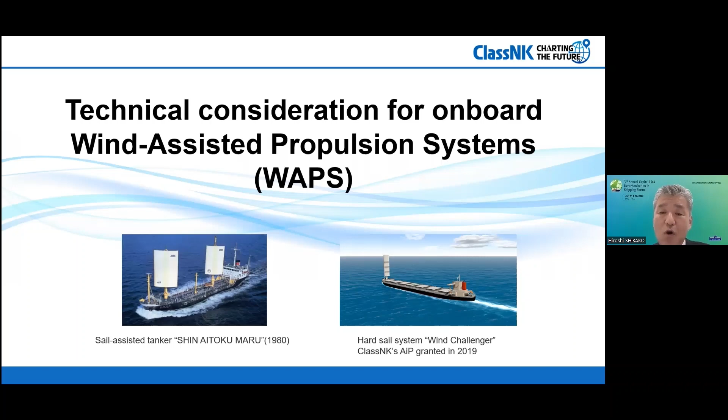Meanwhile, the technical and safety challenges for the installation and operation have been mostly identified, and the necessary countermeasures have been established. Today, on this occasion, I'd like to introduce what should be considered to utilize the wind-assisted propulsion system, so-called WAPS, on board from a technical point of view.

I briefly outline the typical types of wind-assisted propulsion system. Firstly, rigid sail. The sail of the wing-like cross-sectional shape generates lift by capturing the wind. The control of the sail angle, spreading, and setting can be operated according to the wind speed and direction. With no deformation on the sail surface by wind, it can always maintain the optimal wing shape.

A coal carrier equipped with the world's first FRP-based hard sail was delivered to MOL in October 2022. MOL presented at a seminar last year that they plan to confirm the effectiveness of the sail during the demonstration test until the end of March 2024. On its maiden voyage from Japan to Australia, the performance was high when all 4 stages were deployed, and a reduction effect of about 8% was confirmed in the low speed range.

Secondly, the rotor sail. This is a cylindrical device that rotates at high speed, not by the cross-sectional shape approach. It obtains lift by the Magnus effect, a phenomenon in which lift is generated in the direction perpendicular to the flow when a rotating cylinder or sphere is in a uniform flow. The rotation speed is controlled according to the wind speed and direction. High lift coefficient can be achieved by the rotating mechanism. It has a simple structure, and collapsible types are also available.

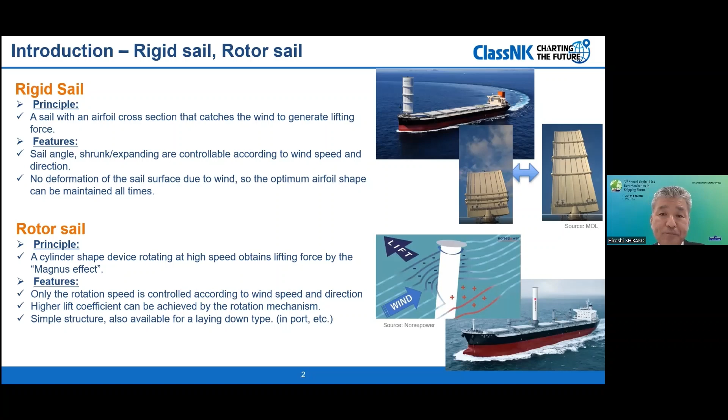Thirdly, towing kite. A kite is deployed from the bow of the ship forward, and it generates propulsion power by catching the wind and pulling the ship. The kite flight is automatically controlled, and its launching and storing are also automated. It can utilize stronger wind at higher altitude. In March, K-Line specified the coal carrier to retrofit the system. They expect the reduction of CO2 emission by at least 20%.

Finally, turbo sail or suction wing. It controls the boundary layer around the device and generates lift, not with the rotating mechanism, but by using movable flaps and a suction mechanism. The suction mechanism and the flaps are controlled according to the wind speed and direction. A higher lift coefficient can be achieved by the suction mechanism. As well as the rotor sail, the structure is simple, and they are collapsible type.

Marubeni Corporation, a Japanese trading house, announced a joint project with partners for its installation on a Panamax bulk carrier, and expected a reduction of up to 15 to 20%.

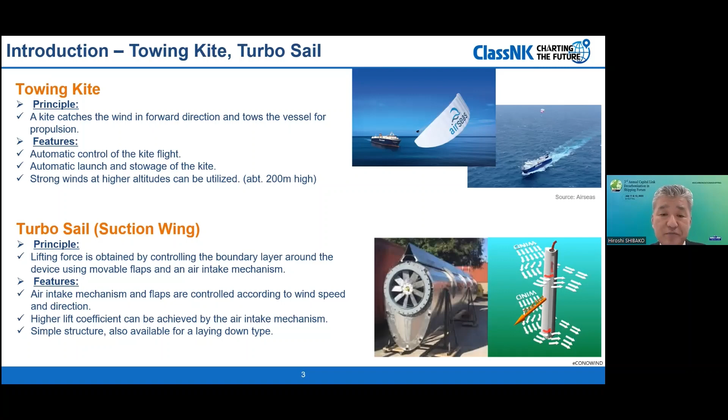For implementing these systems, class societies provide safety standards and certification based on them. Standards are to be applied to the safety of the system itself and the safety of the base ship where the system is installed. Moreover, from an environmental perspective, as the international rule for reflecting WAPS into EEDI and EEXI had been stipulated, class societies also work on its verification. We anticipate the need for third-party certification of its effect from the commercial or ESG perspective. We believe that our expertise can be utilized in meeting these needs.

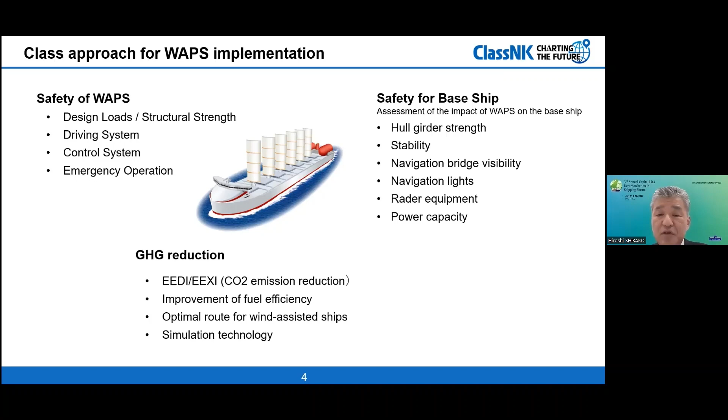Let me explain the specific verification steps. For the system's design, we review drawings and conduct on-site surveys. Once compliance of the wind-assisted propulsion system with the prescribed criteria is confirmed, we issue a product certificate. When installing the system on a ship, we review the design and conduct surveys for installation as well. Upon request, we grant class notation. In case of ClassNK, notation is optional, but periodical surveys are required if applied. As WAPS is likely to include new concepts, we may also issue approval in principle as needed.

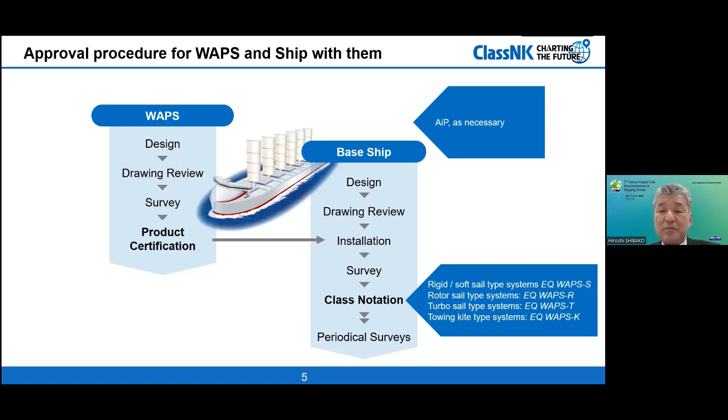We have published the standard for the system and its installation and operation as guidelines for wind-assisted propulsion systems for ships, and issued the first version in 2019. Thanks to opportunities to be involved in actual projects in recent years, we have incorporated feedback from our experienced drawing reviews and surveys, as well as recent trends, and updated to edition 2 this April. We are confident that the latest version has been significantly improved in terms of clarity, comprehensiveness, and level of detail.

The principal safety philosophy of the guidelines is based on functional requirements and risk assessment. Functional requirements include safety and reliability of the systems, safety and reliability for operation, resistance to failure, protection of personnel and environment, interference with the ship function, and assessment of compatibility.

Following the general section, the guideline provides requirements for WAPS base ships, on which WAPS is installed, and surveys. In view of identifying and mitigating potential risks caused by WAPS installation, which are new and diversified, conducting a risk assessment has been included as one of the requirements.

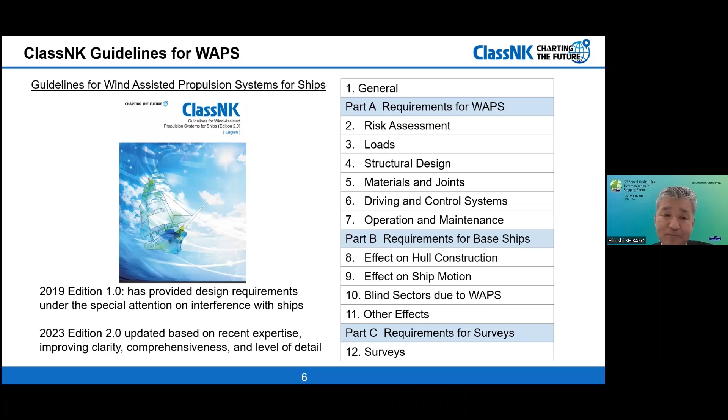As for specific requirements for the system, we have set requirements in Part A of the guidelines. For example, we have clarified and detailed loads and load cases for the structural design of the systems. 4 kinds of load are anticipated, namely aerodynamic loads, loads due to ship motion, green sea loads, and other loads. There should be 3 load cases, namely in service, standby, and abnormal condition. For each condition of 3 load cases against each kind of load, we have set the criteria, which should correspond to any potential situation.

For structural design, we provide yield strength, buckling strength, and fatigue strength evaluations for structural components of WAPS. For driving and control systems, the requirements for electrical systems, hydraulic systems, and control systems for the operational process like rotation, expansion, or contraction, inclination, movement, and storing are provided. For operation and maintenance, we have clarified the items that should be included in the operation manual. For WAPS product certification, after drawing review and surveys during the manufacturing, load tests and operating tests shall be conducted.

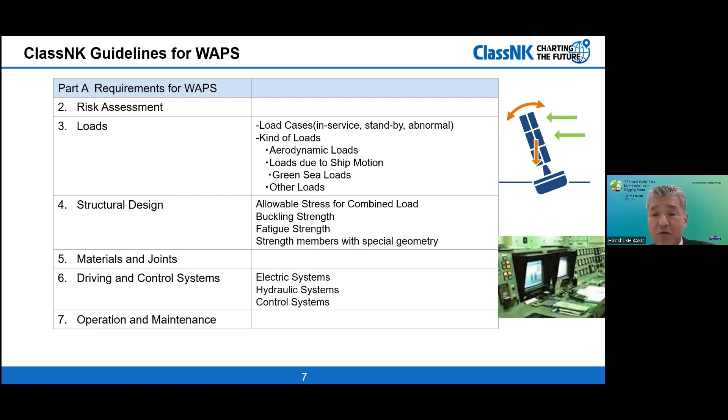Regarding the requirements for base ships, attention should be paid to these factors described in Part B of the guidelines. The ship's design should be developed in consideration of the installation of WAPS, with deck plating and under-deck structure providing adequate support for WAPS. For that, the guideline provides yield, buckling, and fatigue strength evaluation considering the load caused by the WAPS. Hull girder strength is also a factor, and changes in light weight and position of the center of gravity also affect ship motion and stability. Especially the intact stability shall be verified with the increase in wind heeling moment due to aerodynamic loads acting on WAPS.

For maneuverability, the effects of hull heel and leeway should be taken care of. For ship speed, attention is necessary not to reach a service speed greater than the speed corresponding to its engine MCR through a combination of the main propulsion system and WAPS. Then the guidelines stipulate the methodology for the impact on navigation bridge visibility, navigation lights, and radar equipment due to the installation of the system. Other matters include the equipment number, electrical installation like power capacity, protection against short circuit, and hazardous area, fire safety, and gross tonnage, and so on. In Part C of the guideline, the requirements for surveys related to WAPS are provided. After the installation, WAPS is subject to testing and confirmation at periodical class maintenance surveys.

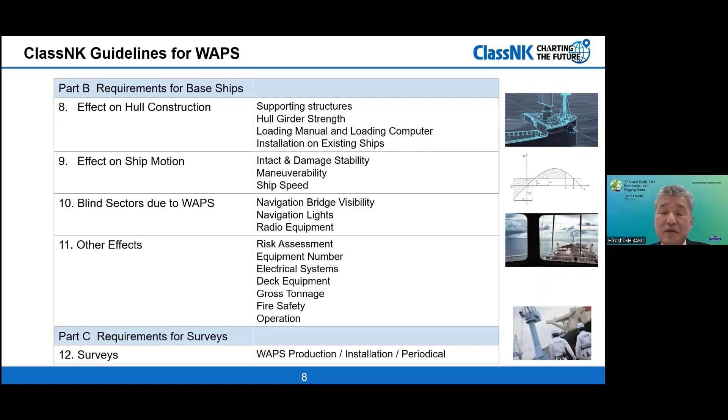I would like to refer to typical items for safety consideration. In terms of the arrangement, firstly, it is essential to comply with provisions of the class rule for navigation bridge visibility in consideration of blind sectors caused by the WAPS. For navigation lights, it should satisfy the provisions of COLREG on top of consideration of the shading caused by WAPS. Depending on the case, confirmation with the flag administration is necessary for these items. Regarding interference with cargo handling equipment or helicopter deck, confirmation for the operation at each port of call is recommended. In addition, the installation is likely to bring changes in light weight, longitudinal and vertical center of gravity. In such cases, an inclining test and update of related documents are required.

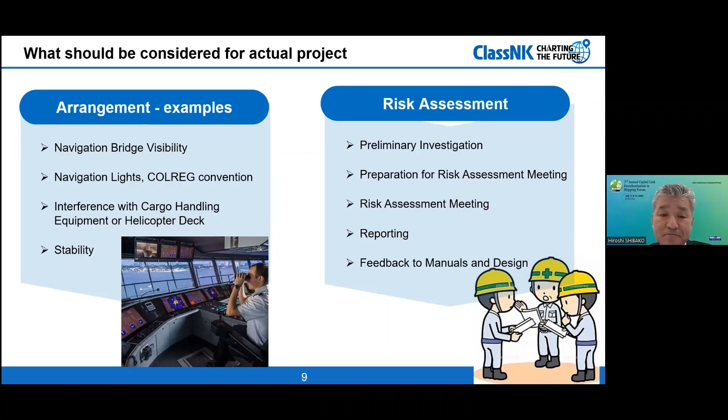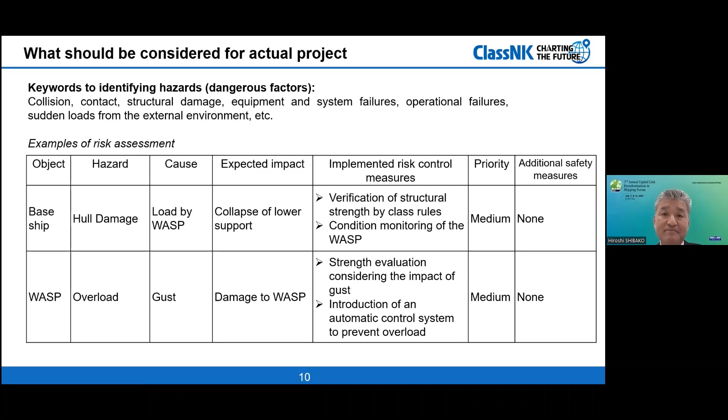We hope these tips will help facilitate the introduction of such systems. As mentioned, the uptake of wind-assisted propulsion systems is rapidly increasing. We recognize this as a reflection of industry expectations amidst the need for various approaches toward decarbonizing ship operations. ClassNK aims to support smooth implementation by establishing appropriate standards and providing reliable drawing review and survey service in line with them. We also look forward to deepening the dialogue with stakeholders, including the ladies and gentlemen attending today, for future adoption and advancement of the related technologies.